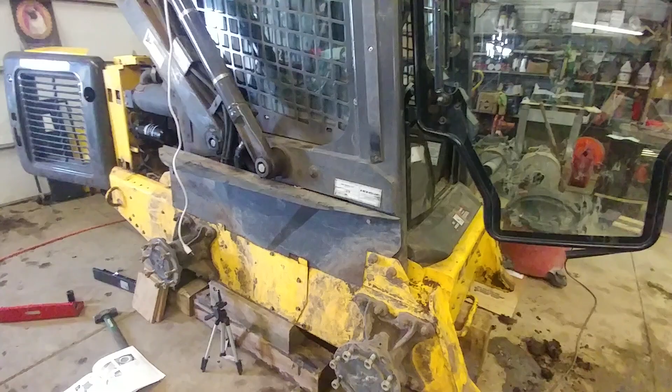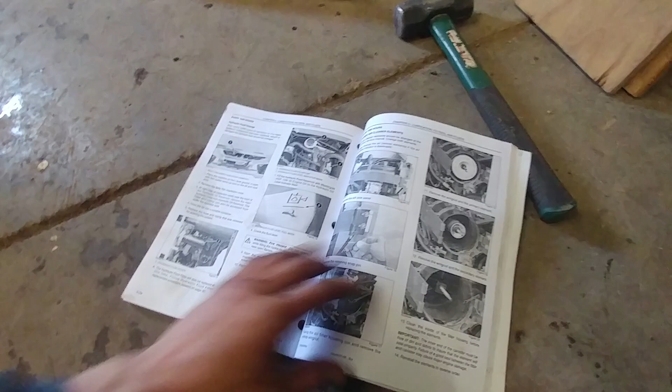So I'm out here doing some maintenance on our L175 skid loader, as you can see. And one of the things that it mentions in here is to check the drive chain oil, okay? Right, what does it say? Make sure you grease the axles every 1,000 hours or so. Anyway, it tells you in here that you need to check the drive chain oil, and it should be about to the bottom of the plug, which is located right here on the side of the skid loader.

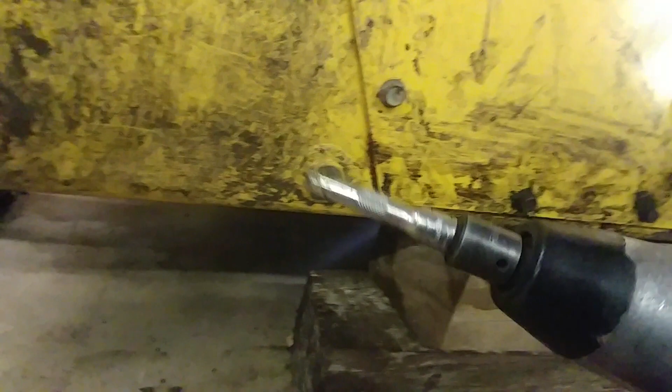So the wheel shouldn't be in the way, but if it is, then pop it off. So we'll just go over there and check it on the other side. It's got a 3/8 sized cutout in it. So you're just going to take your 3/8, make sure it's in reverse. That's the wrong way. Okay, that's correct. I'm going to stick it in, and then just pound that till it comes loose.

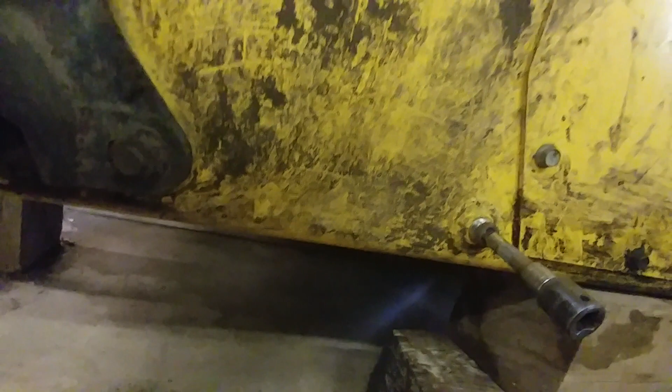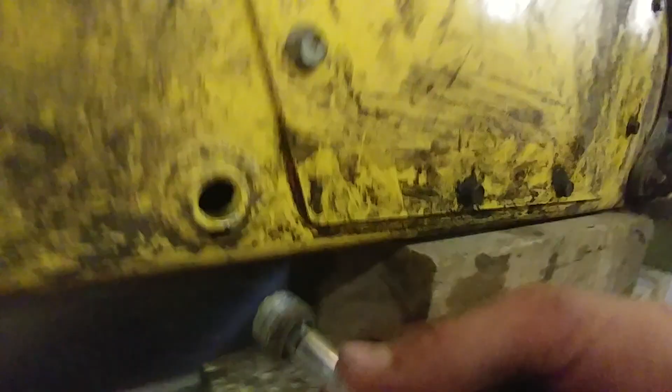And there could be a little bit of oil that could fall out, so be prepared for that. So, touching my finger in there, that one's perfect. Right at the level of the bottom of the hole. It's kind of interesting though. The reason why I said is because when I took that off, I felt a little like exhale of air come out of there. So it must have been at a slightly different pressure than the pressure here inside the shop. So as long as there's still oil up to that line, it's fine.

That is just to lubricate the chain. And you just want to make sure. The other side, actually, a little bit of oil dumped out. So it is good to know that there's plenty of oil in this. And thread it in as far as you can by hand before you use any sort of impact on it. About there is how tight it was. Don't over tighten it unless you really hate the guy who's going to check it next. And that should be about all for checking that.

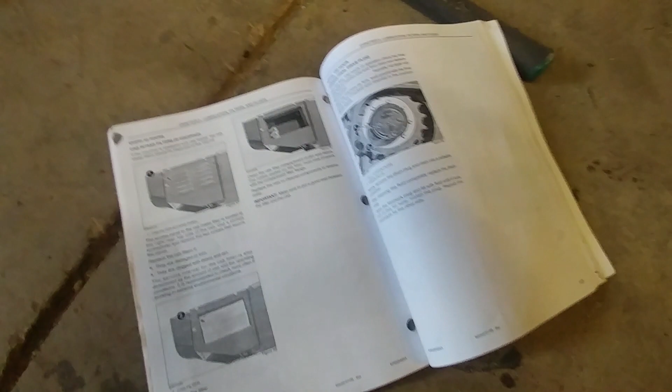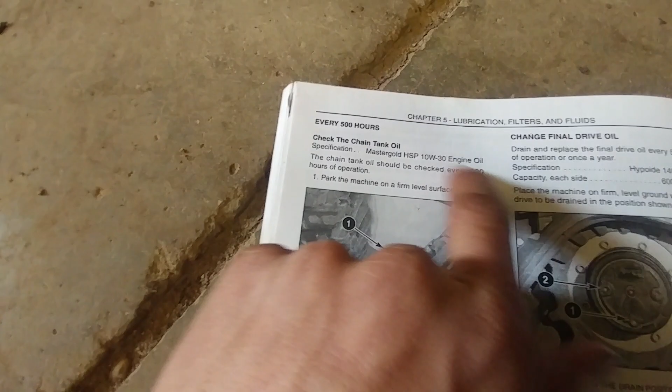I'm going to find in the instructions where it tells you about it so I can just read you what it says. That'll take me a minute here. There's a lot of info in this book. So finally found where it's at. Every 500 hours, it says here, check the chain tank oil. And they want 10W30 engine oil in there. You should check it every 500 hours of operation, about somewhere in there. You can see that's the plug that we just opened up on the side of the skid loader there.

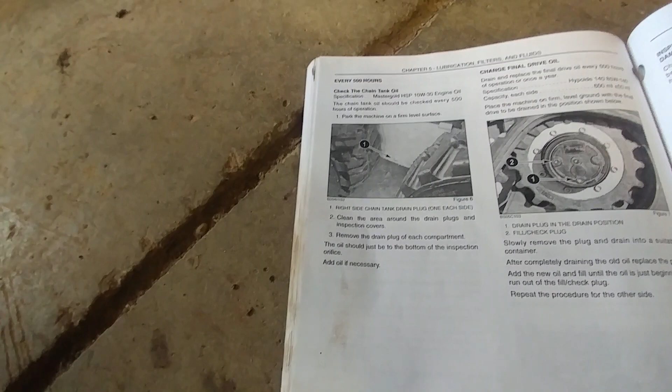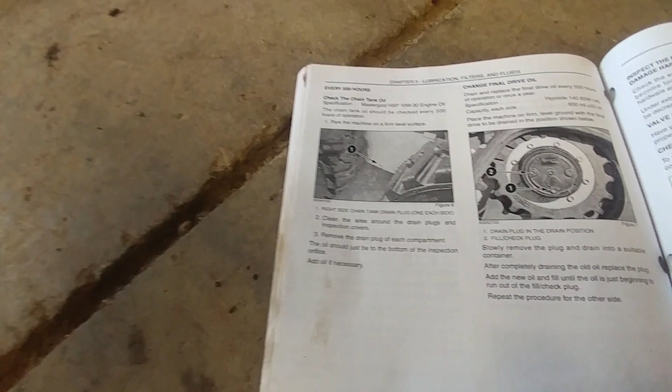You want to clean up the area around it, which I did. Use a shop vac, cleaned up all the dirt. Then you remove the drain plug from each compartment because they're separate, one on each side. And the oil should just be to the bottom of the inspection orifice. Add oil if necessary. And again, if you do add oil, it's 10W30, and I'm guessing you just add it straight into that hole because it hasn't said anything different here.

So anyway, that's how you check the drivetrain oil. And it's important to maintain your skid loader well so that you're not spending a lot of money later. So anyway, I'm going to get back to work here. I got a couple more things to check before my maintenance day is over.